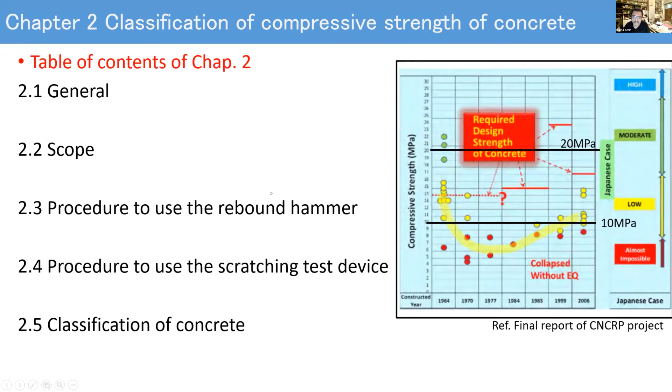That is our proposal. And finally, this leads to the classification of concrete, which we will be presenting at the end of this presentation. So the basic procedure: most of us, and maybe everyone, knows about the rebound hammer.

But here we have proposed a rebound hammer of a slightly different specification, which depends on the velocity ratio. Actually, the velocity ratio gives us some benefit over our traditional original Schmidt hammer, which we call the original rebound hammer, because it is direction independent. It depends on the velocity ratio, as you saw in the first part of this presentation. And here at the tip, it has a flattened edge.

We call it a mushroom type of hammer or mushroom head. The mushroom head gives us a wider area for judgment. Otherwise, we might have some bias. We have seen the bias in our results when we use the normal head hammer. The normal head hammer has a smaller area, but the mushroom head gives us a larger area.

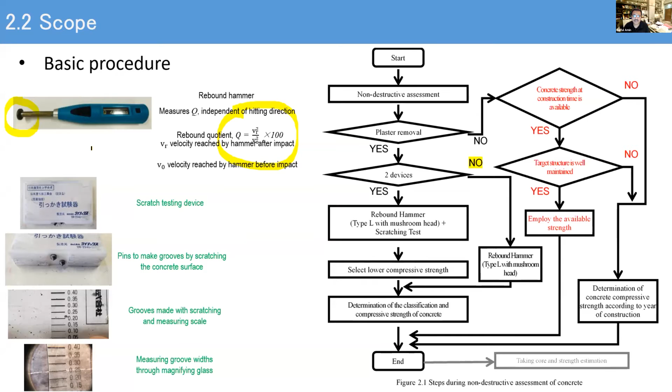And it's not a new device we propose here. It is actually commercially available from many renowned manufacturers. So we chose this device. Another device we chose here is the scratch testing device. It is basically based on the groove width. We apply a specific force through a spring, indent the concrete and measure the groove width.

These two basic procedures will be applied on a prepared surface of concrete, because we need to remove the plaster and other debris, and we need to grind the surface smoothly with a hand grinder. All these things are presented in our manual. So for the basic tests, after the plaster removal, we'll apply the rebound hammer and the scratch test, select the lower compressive strength, and based on this, we'll classify the concrete.

We can also go to other things. If the concrete strength at the construction time is available, and the target structure is well maintained, then we'll have the concrete strength. So we can take either of the two routes. This is the basic policy to characterize the concrete strength. We want to have the concrete strength from the basic data gathered during the construction phase or some test data.

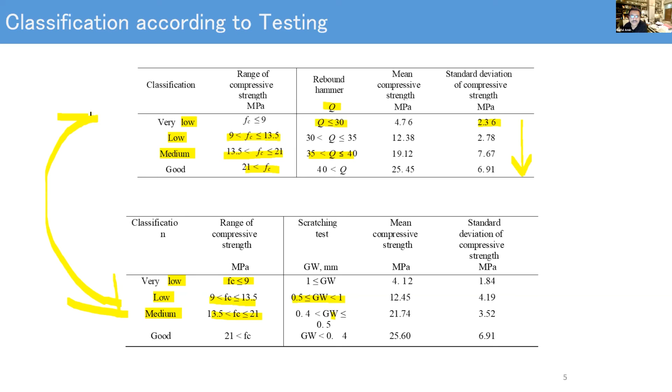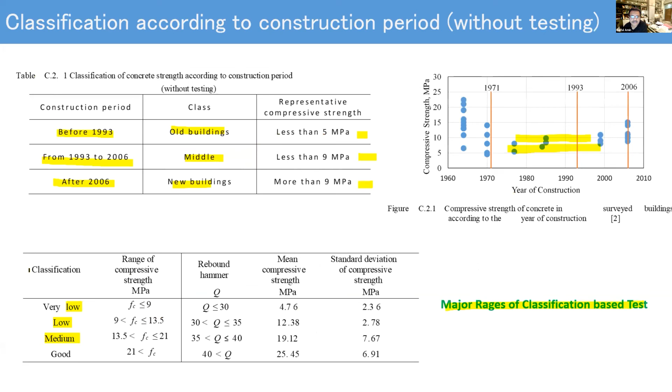The first method is based on the Q value, and the second one is based on the groove width. Groove width means the indentation width that we can measure from this scratching device, and from here we can go for the scratching test. So how do we do it?

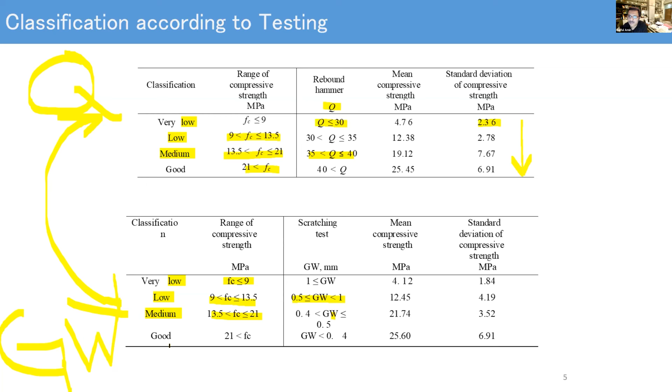Basically, this table was prepared based on evidence that we gathered in Bangladesh in our laboratories, in the field in Bangladesh, and also in a laboratory at Tohoku University. In our team we have Professor Nishiwaki and myself at BUET, and also the big SATREPS team. We all work together. And Miss Maisha Maliha, who is now at Tokyo University, did her graduation and post-graduation thesis at Tohoku University on this topic. So based on this, we could come out with these results that we are presenting to you today.

If we look at the evidence, we can see there is a direct correlation between the rebound quotient and the groove width. If the rebound quotient increases, the groove width decreases because it is a stronger concrete. But if the rebound quotient decreases, the groove width increases, as it has to for low strength concrete, and we can see this part is basically a very low grade concrete.

But this part is basically what we want, because it is 21 MPa or more strength. So this is our minimum expectation, that our buildings are above 21 MPa. That is the major part. Then we may have something here, or something here, or unfortunately if we have something less than 9 MPa, then we cannot move forward.

And here we show the good correlation we achieved between the groove width and the compressive strength. There is an inverse relation: the higher the groove width, the lower the compressive strength. Here we determined the groove width for different specimens. These are the field conditions in Bangladesh, and also the Japan laboratory conditions, and we found this type of correlation.

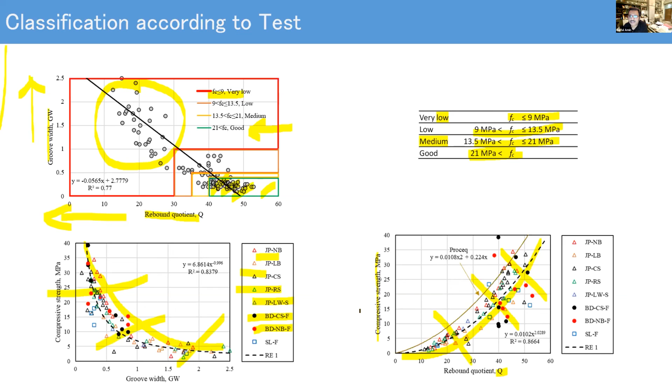And for the rebound quotient, if we look at the Proceq calibration, it is a little bit away. We used the Proceq hammer in our study, but of course we found our own correlation for the rebound quotient Q and the compressive strength, as you see in the relation. And we performed the statistical analysis for each of the strength ranges here, here, and here. This statistical analysis is based on the three ranges.

If we look at the range where Q is less than 30, or groove width is more than 1, we can see this type of distribution where the probability of occurrence is about 100%. But if we go to the higher strength, for example if we want to declare some concrete above 21 MPa, we can see from the normal distribution function the probability is around 72% or 75%, and in between we have the other values. This gives us good confidence in where our ranges are coming.

So 9 MPa or below is one range, then 9 to 13, 14 to 21, and 21 and above. Based on this, we are giving such a classification, and this is the philosophical figure where we take the Q value and groove width value as NDT parameters, and correlate them with the cylinder compressive strength with a calibration function and statistical analysis.